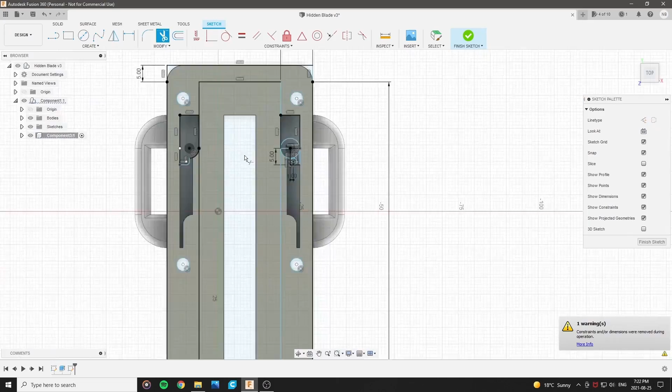I interrupt this montage to show you guys the bottom case and the middle case with our slider. Now that I have these parts printed, we can test the fit. I also have the blade printed so we can put it all together, kind of like so.

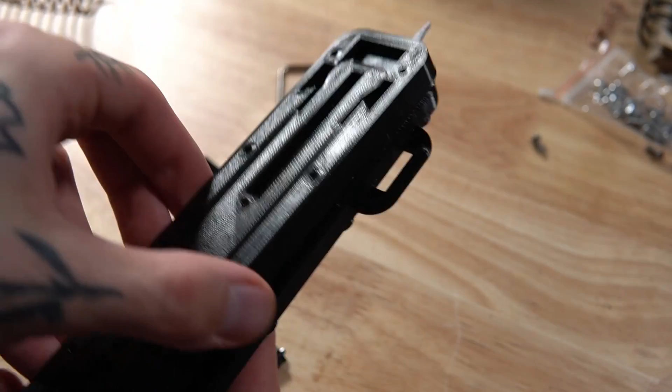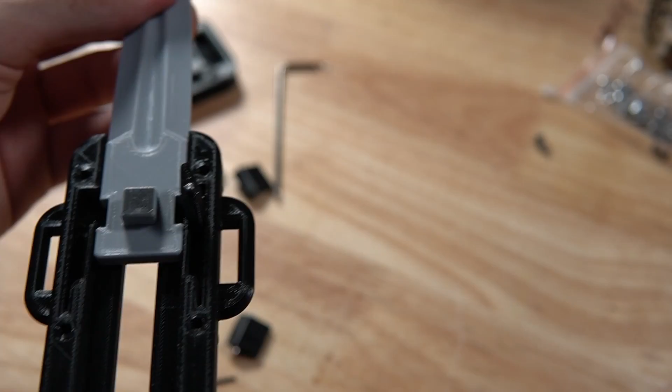First, before we can really test it, I need to put the pin locks in with some springs. These are just bobby pins that I cut to size. So the spring goes in here. Come on, spring. Our pin is nice and springy, so it'll lock just like that. Awesome.

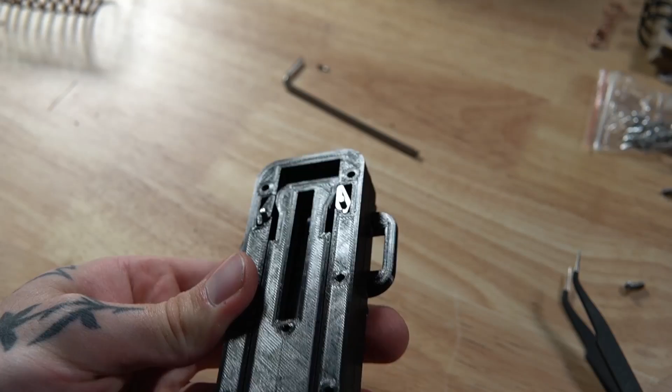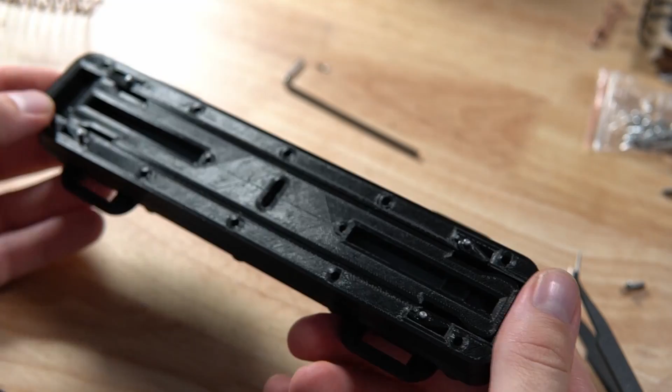Working like a charm. Okay, now we can go ahead and test the blade. Oh, it's not moving anywhere. Unlock. Yes. Now it should lock in the back, and it is. Unlock. Brilliant, brilliant.

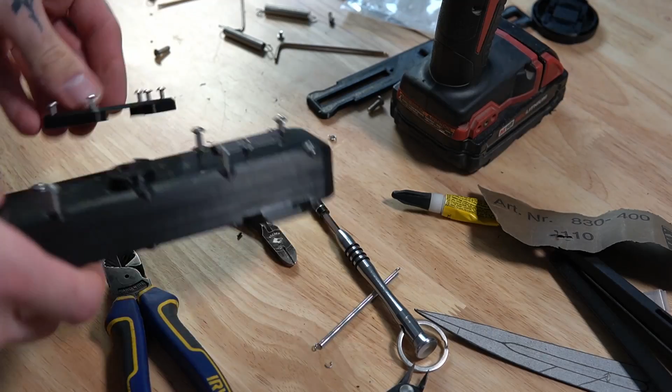Everything's printed now. I have a spring in here. I'll point it down so that it's using gravity. You just rotate the little wheel here. As you can see, it doesn't have enough power to shoot it out all the way. So I've been wrestling around with this problem for a little while now, and I've got shorter springs and longer springs. I've tried both, and it hasn't done much, because as soon as I put a longer spring in, there's too much internal pressure and friction. It's like just bending the slide, keeping it from sliding properly.

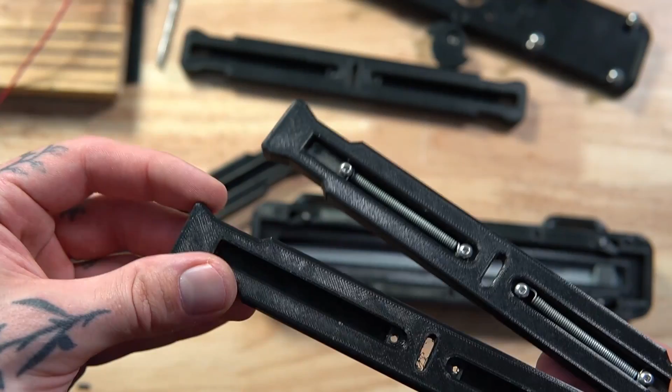So I have been busy printing. Got multiple slides. The only real difference between these slides is the size of the little nubs here that actually trigger the locks to release. You see the difference there. So essentially this just gives the spring more time to actuate. Well, I guess that leads me into my next observation.

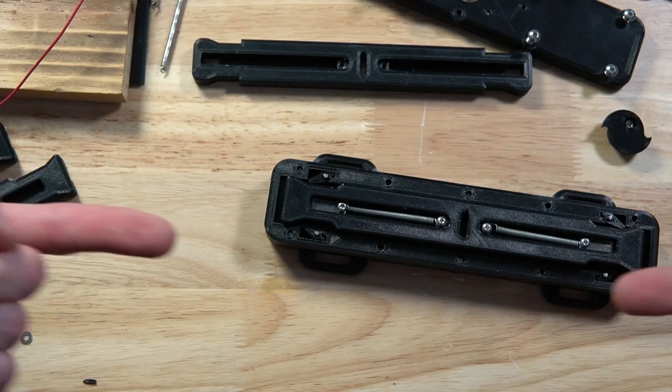That is, the blade is being pinched by the downward pressure of the slide, I think. If I push linearly so that it's just in the horizontal plane here, it actuates just fine. As soon as I push down, there's a little bit of friction that slows the blade down just enough to keep it from locking all the way. It worked that time, but it's inconsistent.

Okay, so I wanted to wait to show you guys this, but look at this. So all it needed was a sheet metal plate on the back here, because I was struggling with keeping this thing rigid enough to keep it from bending inwards like this and then pinching on the blade. Oh, it works so well. Let's go.

So, took about a week, but I have all of our parts ready to go now. Kind of, I think. The only thing I haven't tested out is this thing, which is going to be the spring, but we'll get to that in a second. First of all, I want to cover the slide because I think I kind of skipped over that previously, so we'll talk about that, and then we'll get into the other stuff.

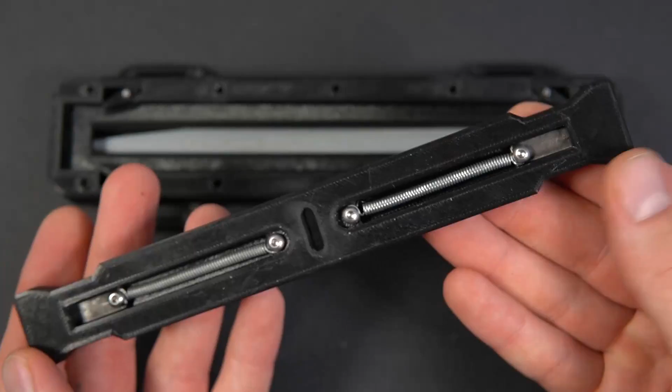There's two main actions that this thing needs to do: firstly, it needs to unlock the pins, and secondly, it needs to shoot the blade forward and backward. So as I push the slide, the hook stays in place until the lock pins are disengaged, and then the whole slide shoots forward. The pins are basically just 90-degree hooks that go through here and are long enough to be covered by the top of the slide. This keeps the slide nice and rigid so it doesn't collapse in on itself when it's pushing the pins. And that is what serves as the main driver of this project.

So let's talk about how I'm moving the slide inside the case here.

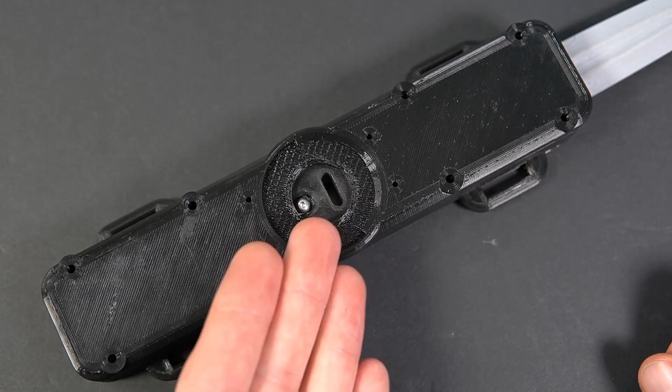Obviously the top cover goes on top. This guy is responsible for all the motion. Basically, the pin just sits inside the groove, and as the pin rotates, the slide reciprocates back and forth within the case. And that's what shoots the blade back and forth.

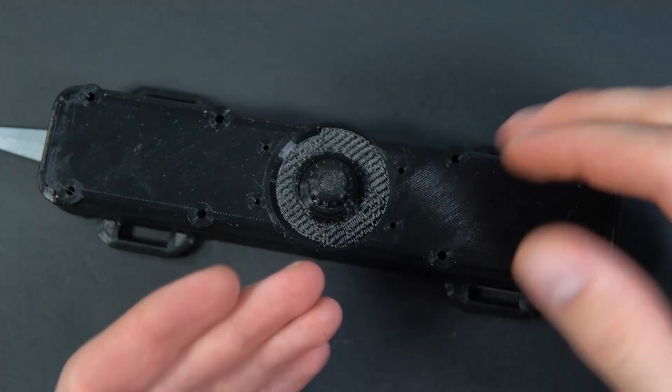So now that we have our back and forth motion, we need a way to spin that from the outside consistently, going 180 degrees. I've dubbed this guy the rotary actuator because it rotates and actuates the slide.

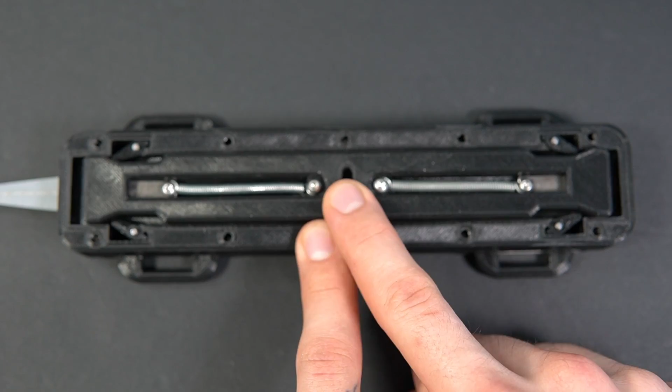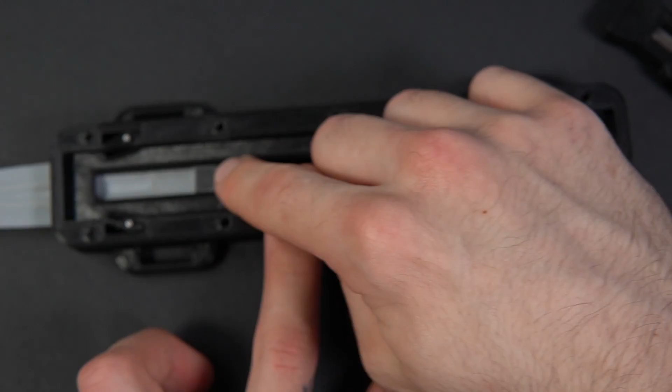Let's say we start at 0, go to 180 degrees, and then over-rotate slightly. The tooth of the slide will catch the blade, let's say right here, before the blade can lock out completely. If the blade isn't locked properly like it is here, the slide can't shoot it back—it has to be locked. So if we have a partial fire where it only goes this far and doesn't lock out completely, the blade's not going to work.

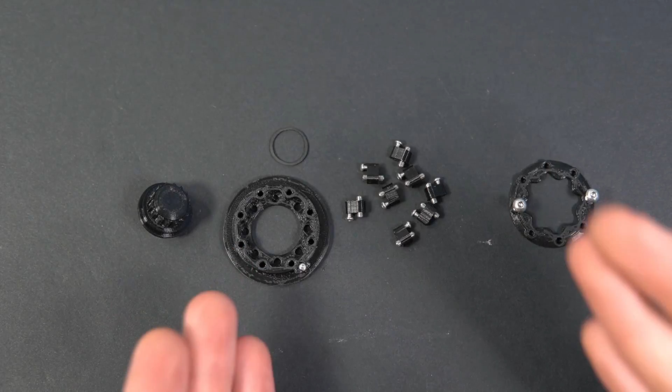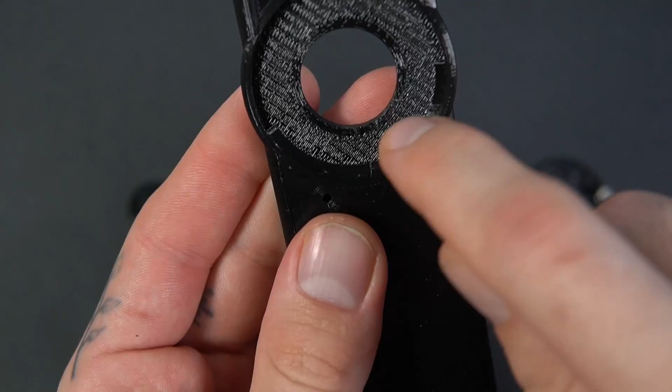With that in mind, I designed a gear system to make sure the rotary actuator only spins 180 degrees every single time. It starts with this base ring here, which has a little nub that indexes with an internal ring here, slanted so it can seat properly. Just give it a second, I'll assemble it, and it'll make a lot of sense.

So once you reach my level of skill, you are granted with literal magic. If you don't believe me, check this out. Aha, see? Told you. But as you can see, the pins are just arranged around the gear so they're all facing the same way and hold on to the gear in the same direction.

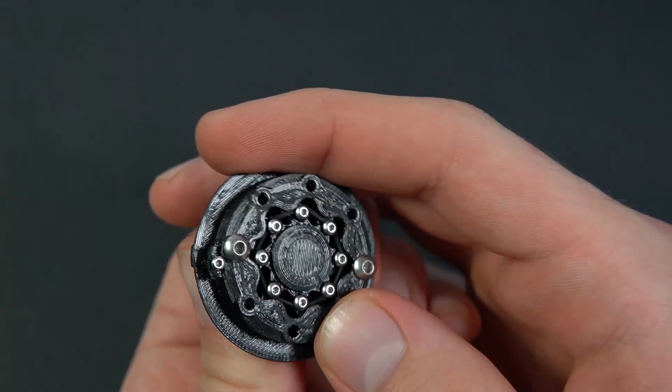Once it's all put together, our piece looks like this. The teeth make sure the gear can only move in one direction—so I can move the outer ring without moving the inner ring this way, but when I spin the other direction, both move. That way we make sure the gear always rotates 180 degrees, always locks out in either the 0 or 180 degree position, and always moves in one direction, because the only way you can spin this gear is by pulling it clockwise.

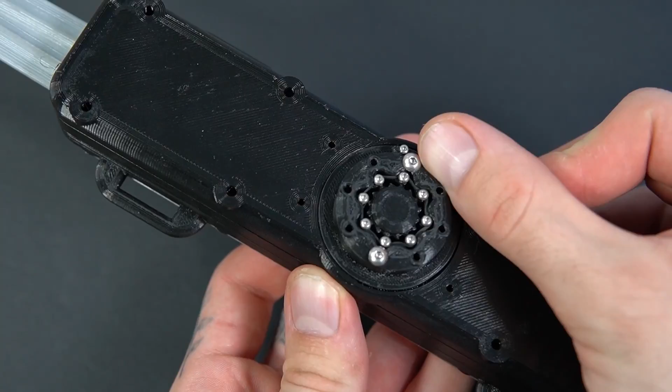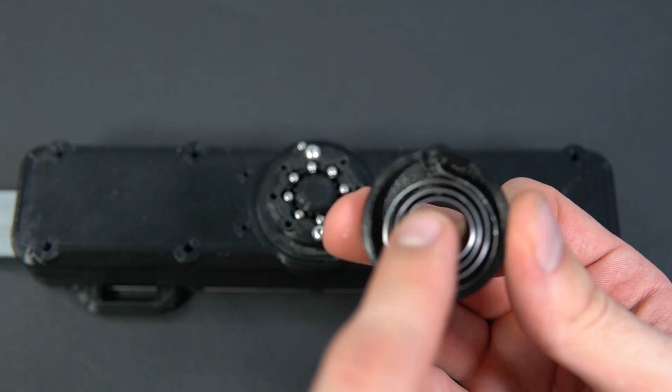But how are we going to make it return home? We need some sort of spring for that. The distance from the actuator to the back isn't enough to allow for a regular spring, since there's just too much travel. So what I came up with is this: a hacksaw blade cut in half, coiled up inside with a post in the center to keep it all in place, and it just spins about its axis. I think it can do a full 360 degrees, which is more than enough to put tension on this thing.

It just sits on the back here. So as soon as this ring spins, it puts tension on the spring, returning it home once I've released the mechanism. There are also some spacers—this guy sits here, the other goes in the back, and there's a cover ring for the mechanism to keep it all together.

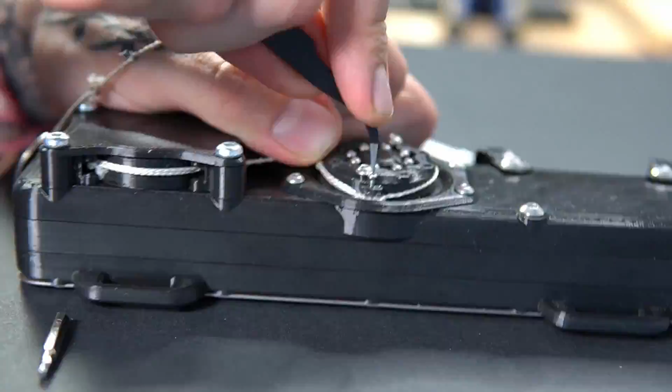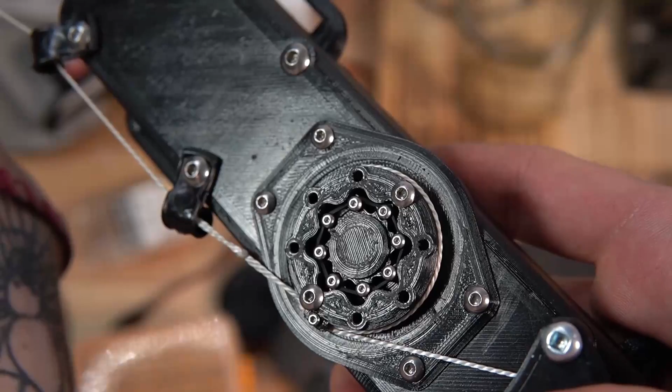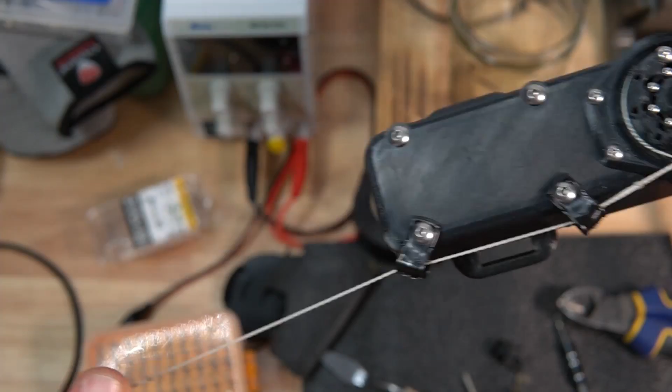Yes! How dope is that? Bam! It's a little bit bulky, like the width of my wrist, but for a Mark I version, that's pretty good. That's like a proof of concept right there.

I'm really stoked about this thing. It's pretty cool. Practical? No, not at all, but cool for sure.